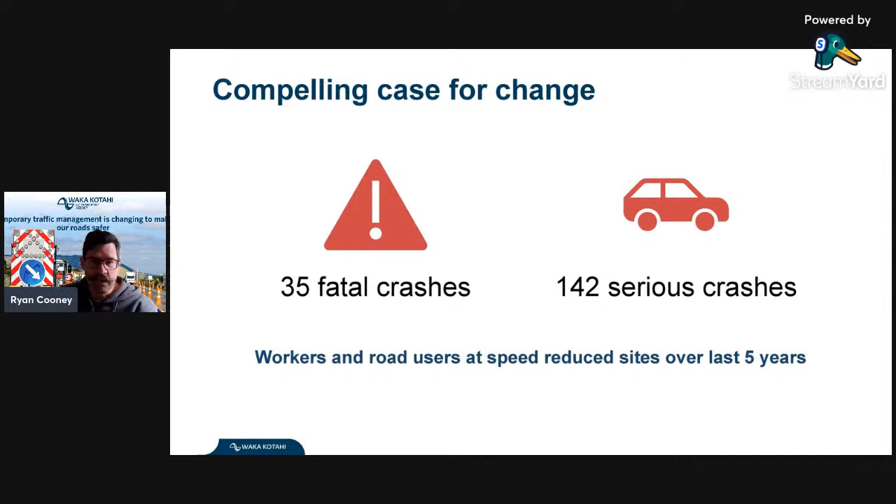There's another really important point here, which is around human vulnerability. In the guide itself, I talk about how a human being struck at 30 kilometers an hour has a reasonable chance of survival, up in the 90% range. A human struck at 60 kilometers an hour has a very poor chance of survival. And then we can carry on that same style of conversation for being in vehicles, etc. And obviously, this is all about safety being a critical decision-making priority.

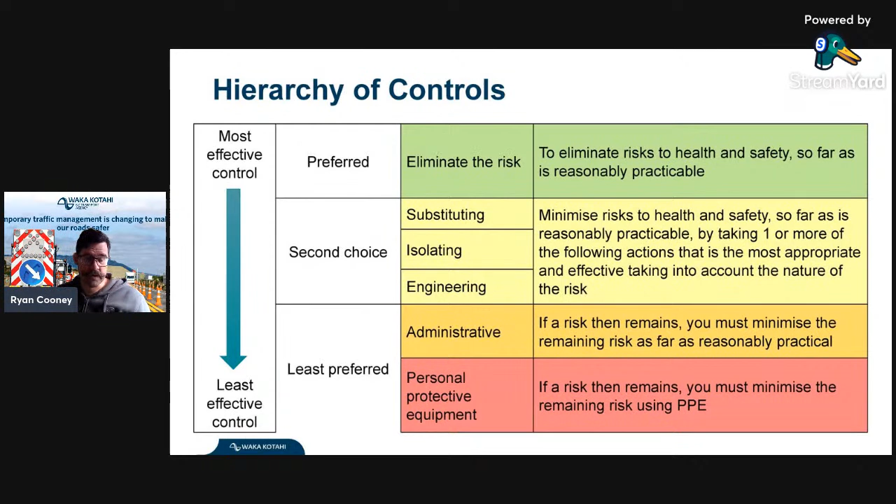So therefore, this starts to hint at doing things like stop-stop closures, where you stop all the traffic for a period of time to undertake your work, and then let that traffic go whilst the worker is out of the road. And I would hope that many activities that you good folk are involved in would enable you to think about applying types of practices such as that. And I know Elise will speak to the practice note in just a moment.

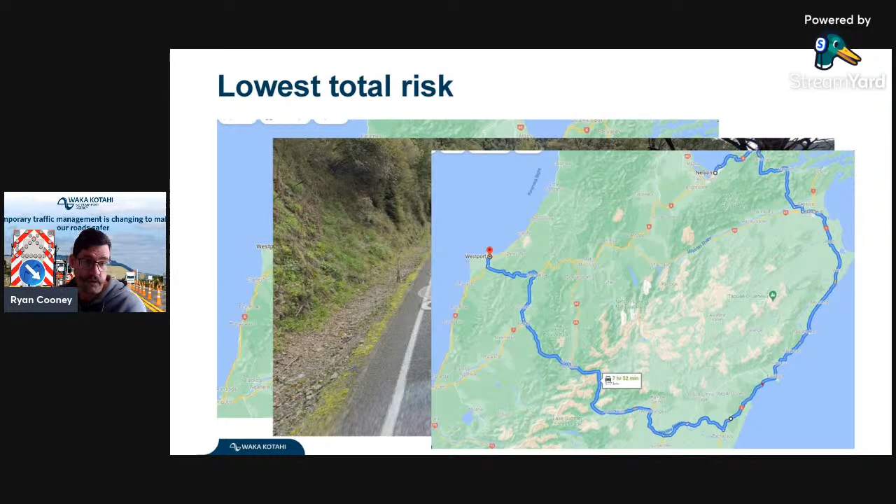So I will try and wrap up with these next two slides. Firstly, we have received all the feedback, 1,200 lines of feedback. Thank you very much to those who contributed. As I say, it was quite diverse in its feedback, so it made it quite challenging. However, we've identified 10 major changes now to enable us to publish version 1 of the New Zealand Guide. The intention with that is to move from our theoretical conversations to practical conversations.

So what we're looking to do as Waka Kotahi, as a client organisation, as a contracting PCBU, to use HASWA words, is to engage with our contractor PCBUs to test and trial via some of our network outcome contracts, which are maintenance contracts, and some of our capital or improvement projects. We have identified 5 NOC contracts that we will be piloting the guide through. We're still working on some capital ones.

And essentially we're going to test and trial and learn about many different things, such as training and competency, resource requirements, contractual terms, procurement terms, etc. In short, we are looking to a substantial change in the way in which we contract for TTM. It may be as far as saying simply that when we seek to engage a contractor to Waka Kotahi, we will have a provisional sum approach to temporary traffic management, and we seek a proposed methodology which becomes part of the assessment of the bid. The cost for delivering TTM is not fixed through a methodology such as that.

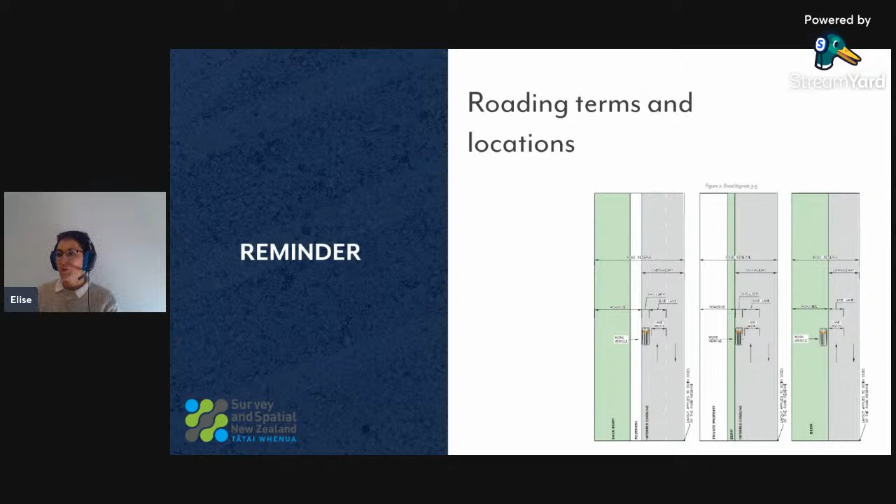And then from there, I could break it into environmental factors. So once we've got all of that information sorted, what kind of road are they going to be working on? So first of all, your terms, your roading terms, just really quickly.

Road reserve, so that is your RCA controlled piece of road, from boundary to boundary, and stops where your private property begins. So there's your boundary line, you've got back berm, footpath, front berm, your carriageway, so edge of seal to edge of seal. You'll see roadside crop up a lot, and there is a very extensive glossary of terms in the front of the practice note.

So when I'm talking about roadside, I'm talking about from that kerb and channel, or from the edge of seal, or where the chip runs out on the shoulder, then we move into roadside, okay? So anywhere where a vehicle would not typically be parked or driving or operating, that's our roadside.

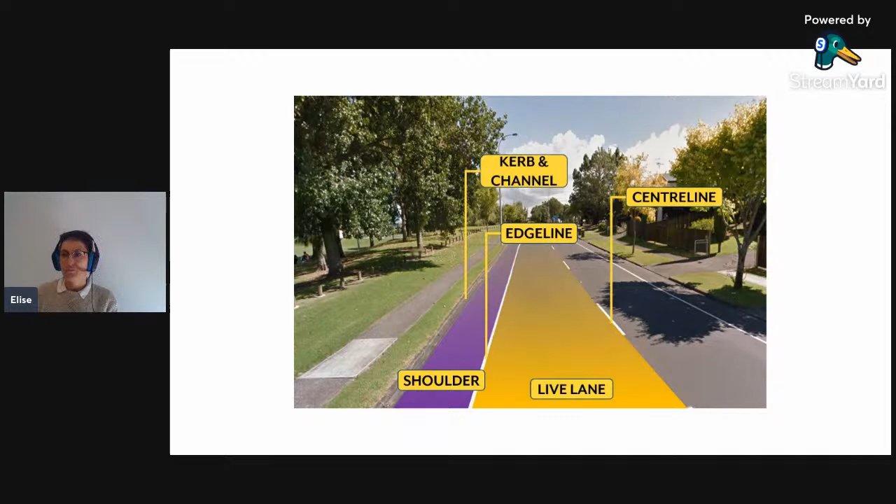Kerb and channel, shoulder, edge line, center line, live lane, they're all very basic standard terms that you should be familiar with. And then I understand that there is a possibility that there are some people on the call today that may not have been introduced to the new categories of road. This has been out now for, I believe, just over a year. Some of the TTM warrants are now tied to these categories as well.

So this did help form a lot of my risk-based assessments when it came to what I thought was appropriate to put into the practice note. So I think it's very important that everybody understands and is updated on the categories of road, because it links directly into the diagrams that you'll be selecting.

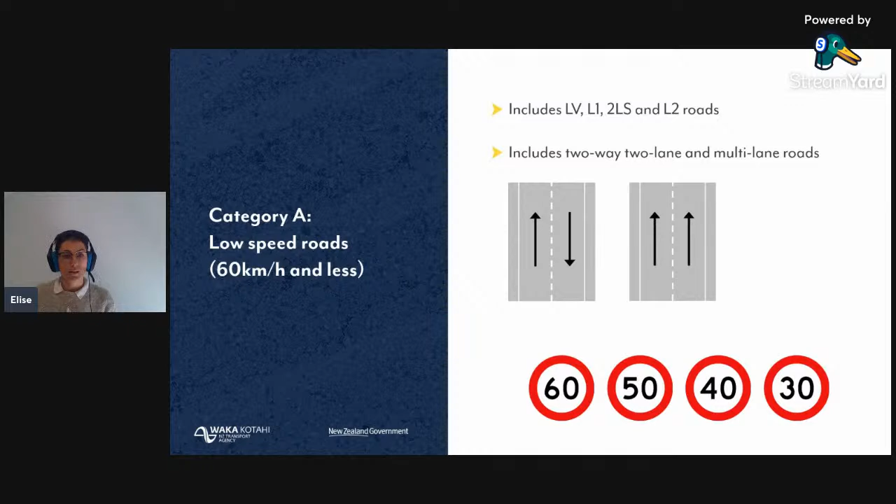So first of all, we've got our category A environments. Okay, they're our low speed environments, 60-kilometer roads and less. Okay, so it does include your 60K roads. They can be low volume, level 1, level 2 LS, or level 2 roads. They can be bidirectional, or they can be multiple lanes in one direction, as long as it's low speed. It's categorized as a category A road.

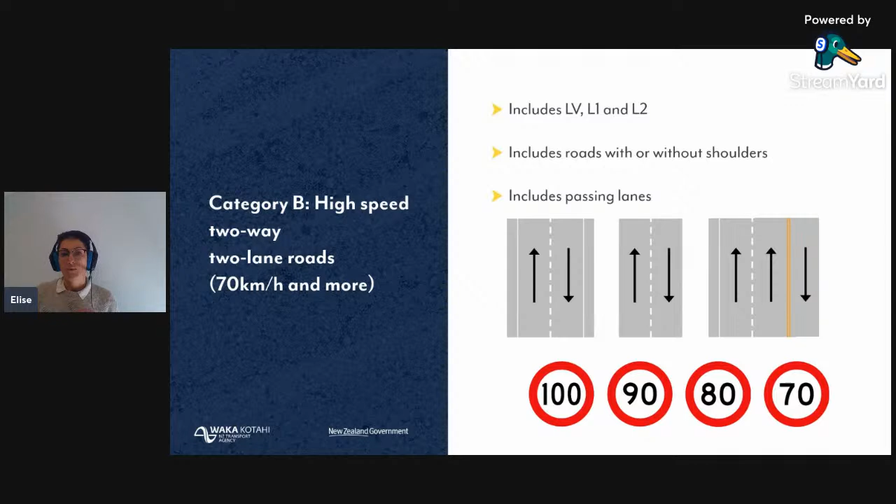Then we jump up to our category B roads. Okay, if you think these are more of our rural-based roads, they typically are from 70 Ks up to 100 kilometers an hour. They can be low volume, level 1 and level 2. Most of them will have very small shoulders, okay? Not a lot of space to pull over onto the side of the road, as we see in our rural type environments. They are mostly bidirectional, okay?

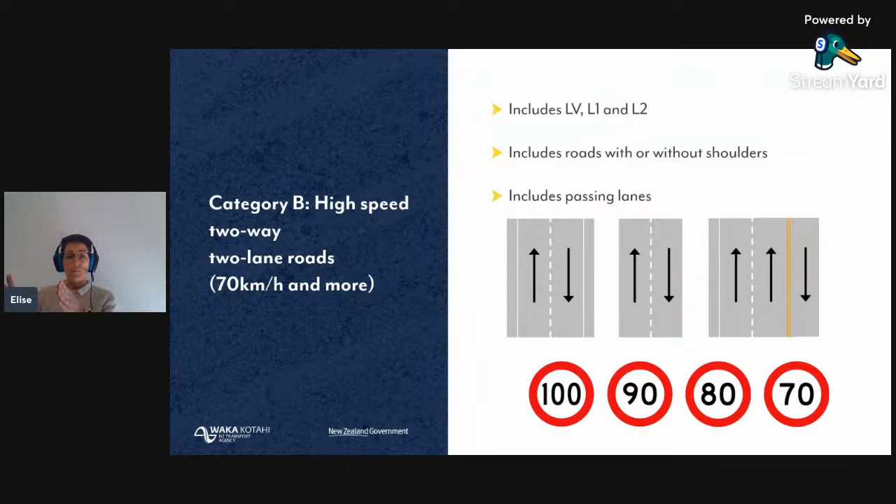But it does include areas where you've got passing lanes. So just because a category B road opens up with a passing lane, it doesn't make it a category C, which is, you'll see in a moment, our high-speed multi-lane roads are our category C roads. Okay, so typically, and now we actually have quite a few in the 110 kilometer an hour permanent speed limit. So 70 up to 110, and we're looking at multi-lanes.

Yep, motorways and expressways. They can still be level 1 roads. You think of all those expressways to Hamilton, some of those are still level 1 roads, but they're multi-lane now, so we treat them as a category C road. On-ramps and off-ramps are also included as a category C road.

Right, so within the document, there is an updated table of who can do what. Now, as long as you are either the old TC inspector warrant or the new practicing inspector warrant, you can do everything that you see in that grey and green box. I took quite a lot of time to make sure that the diagrams that I produced aligned with these warrants and didn't step outside or start to step into an area which would require a surveyor to take on a higher level of qualification.

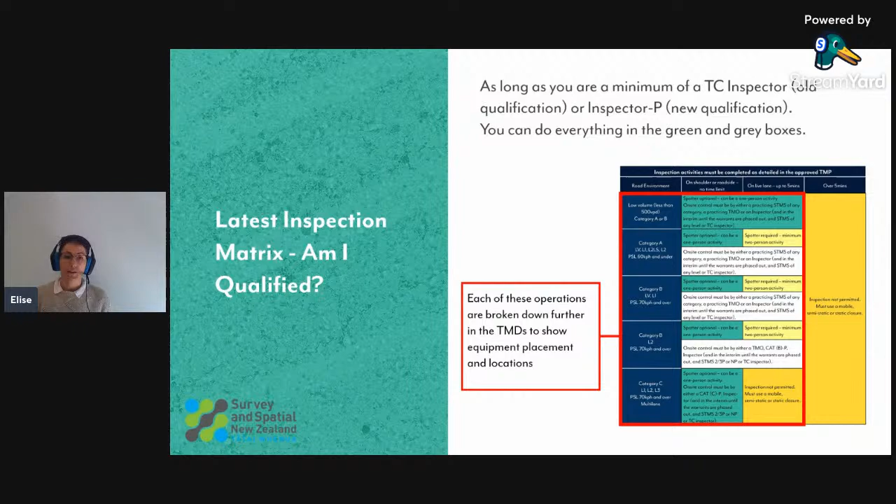So that's why some of the static equipment is optional based on your risk assessment, but it was noted that there was a need in some situations to put cones out. So we'll go over that in a moment. But basic qualification is your TC inspector for the old qualification, or the new qualification, which is called the practicing inspector.

So once I worked through all of those scenarios and I started breaking out the types of operations that I felt were appropriate, a few exclusions did come up. So a few areas did pop up which I felt nobody would be comfortable going out to undertake work. So the first one would be that there's static equipment required in the shoulder of a category C road. So if you can imagine trying to set up a tripod on the shoulder of a motorway, I just did not feel like that was an appropriate operation to include. So I have excluded it from the practice note.

I believe that there needs to either be a static shoulder or a semi-static TMP applied for in that circumstance. And same goes, the majority of RCAs throughout the country will not let you access the live lane under an inspection activity. So that is not included in the practice note. And finally, scenario 3 was where there is the presence of a cycle lane.

I'm going to show you a little bit more detail on this, just so you get a visual for what I came up against. So very common in a lot of our urban environments now, we have these lovely cycle lanes. Scenario number 1 being there's parking lanes close to the curb and channel where you may need to set up your tripod, which is fantastic. You'll be able to park your work vehicle in the normal parking bay and undertake your work.

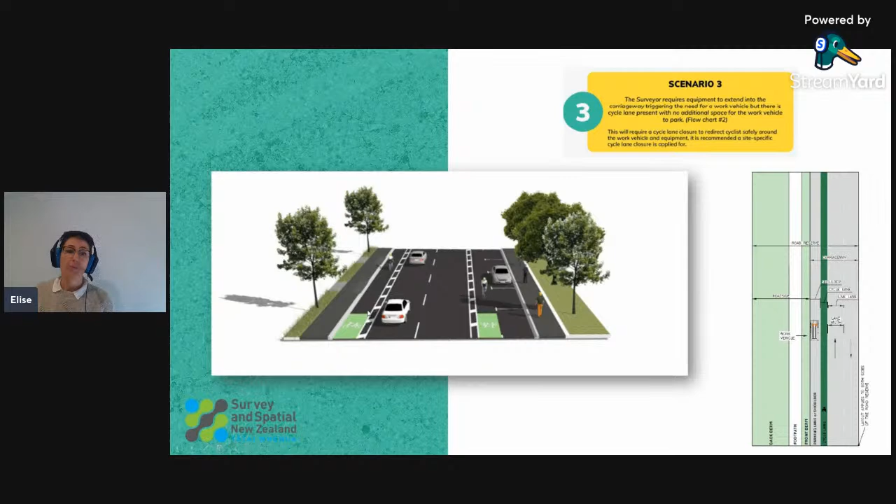So you will see there is an acceptable layout that I have included at the start of the practice note. So in this scenario, totally fine for you to undertake your survey with your static equipment straddling the curb and channel. But if you did go out to site and see that you were going to be lumped with this scenario here, we would be looking at a site-specific TMP in order to close that cycle lane. So that's just a little more context around that third exclusion category there.

There was no real way I could see it working. I did kind of workshop it and try and figure out, could you park back and then put a cone out next to your tripod? But even that, I just didn't feel comfortable. I thought, cyclists have their head down a lot of the time. They're not looking up too much in front of them, and having them swerve out around equipment, I didn't find the risk acceptable.

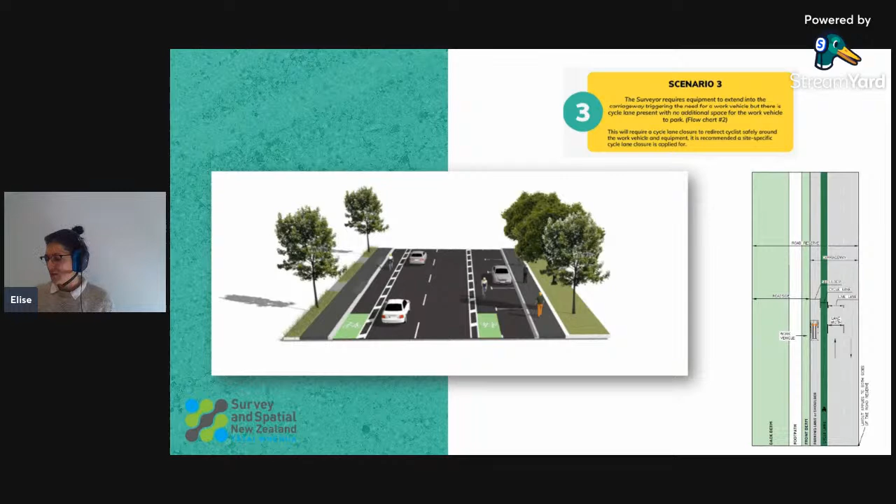So if you did want to check through those categories that we went over earlier, your level of road and your categories, maybe you're interested in lane width and whether or not it's arterial or non-arterial, there is a great website, which I'm sure some of you are familiar with. It's called Mobile Roads. You can just register and click on the RCA where you're going to be operating. It'll load up all of the information on the network, and then you press start and it will pop up a map like this. You find the road that you're going to be operating on, right click, and the information for that road will pop up.

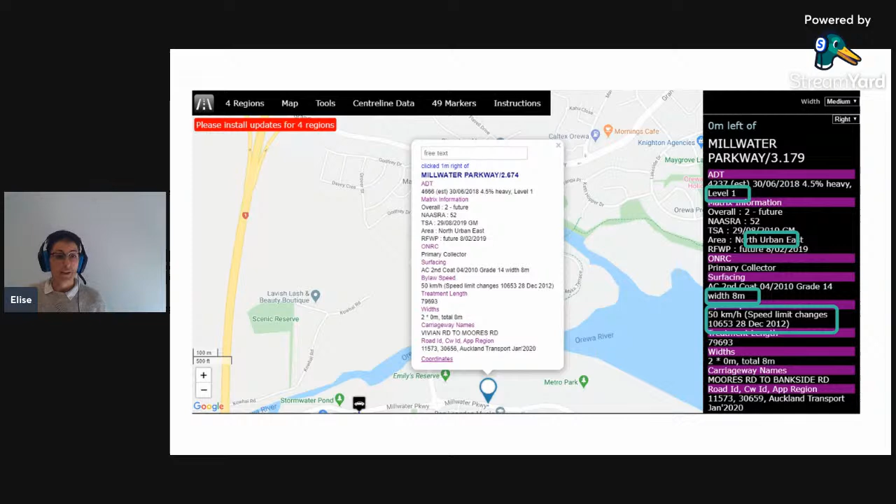So some of the information that will be given to you, and it's not always consistent. Sometimes you have to go and look at multiple databases in order to gain all of the information that you need, but it's pretty good. So you will get the road level in there, the operating speed, the carriageway width, as well as whether or not it's arterial, non-arterial, urban type environment.

So that's really important because we kind of got through the first iteration of the practice note and sent it out to the working group, and they came back and said, there are areas where, so we were always trying to maintain the lane width so that a vehicle wasn't pushed over a centre line when driving past the work vehicle that was parked. And it came to our attention that a lot of times you guys operate in new subdivisions, or sometimes there's rural environments, and there's not even a delineated centre line. And parking is actually designed to be in the movement lane often as well. Sometimes there's indented parking spaces. There's a whole lot of other factors that started to play into it; we made the diagrams too prescriptive in a sense.

And so this next iteration that we came out with was, all right, we need to split our operations into arterial and non-arterial and look at the risk profile of those two types of roads. So I dove into the One Network Road Classification documentation and had a look at some Austroads stats as well about maintaining lane widths on certain types of road, and really happy with what we came out with. We've got different sets of diagrams for arterial and non-arterial environments.

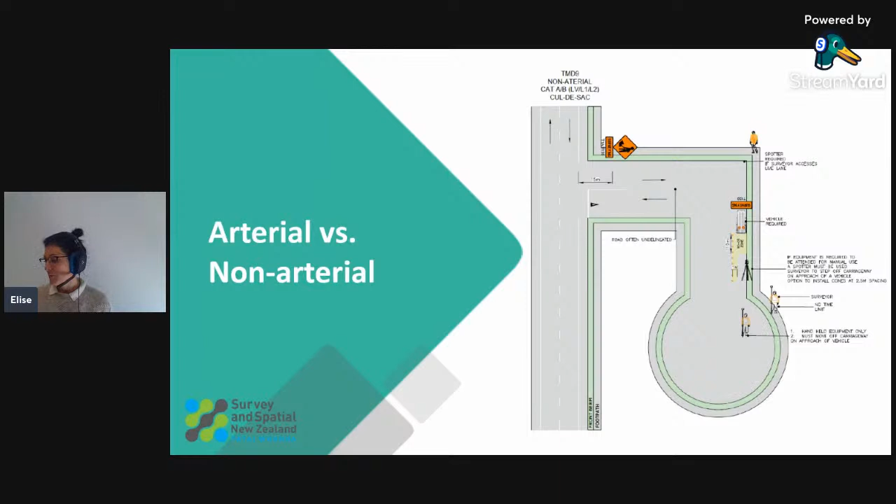Here's a really good diagram to show, in those new subdivisions that you may be surveying, they don't have centre delineation. They don't have line marking. Everybody parks on the curb and channel. That's where you park. A lot of them don't even have driveways or garages that you park off the street. Parking in the movement lane on the road is acceptable, and that may not allow for an entire lane width as we know it, 3 metres or so, to be maintained. So we wanted to make that really clear that this is completely acceptable, and we were happy to accept that risk.

That did make for quite a few diagrams, as you can imagine. We've split it out; therefore, there are 5 flowcharts, decision flowcharts, to help you choose the correct diagram. So once you know the level of road that you're working on, the category of road that you're working on, and whether or not it's arterial or non-arterial, it's quite easy to navigate your way through these flowcharts. So you can see non-arterial, there's just one.

It's very simple, but once you start getting up to those arterial roads, it is split into strictly roadside activities, roadside and shoulder activities, and then activities where you need to access the live lane. So there's 3 charts for that. And then the final one is any arterial roads where you're going to be working behind a permanent barrier system. So there's a couple of diagrams in there as well, because there's a lower risk working behind a permanent barrier system. So those are the charts that are available to you.

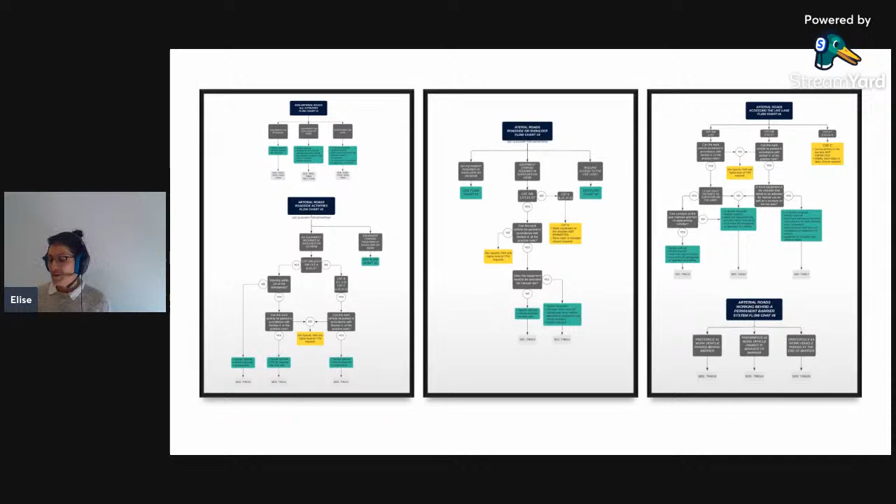If you have any questions, or if something doesn't flow, please let me know. It is designed for you to be able to take out into the field and use as you're doing your on-site risk assessment, to see which diagram is going to be most applicable for you. So just a quick comparison around that arterial and non-arterial. Both of these operations have a tripod straddling the curb and channel or on the roadside, and both of the operations have a surveyor needing to access the live lane to take a mark.

So when we got feedback from the first time round, surveyors said that often they have to park their vehicle where everyone else usually parks their vehicle, and that can block the signage on the back of their vehicle, so they wanted an option to be able to walk out a static advance warning sign. I didn't see an issue with that. Most of the time, roadside, you can walk it out. We do just ask that if you did need to install it, you park your vehicle in front of it while you install it, and you obviously install it from the side of the road.

They also came back with wanting to keep the parking bay in front of the work vehicle vacant. So being able to place 5 cones along the front of the work vehicle to keep that park free and protect the tripod slightly, that was put in there. Note that it is optional though. Okay, so you'll see that they are grayed out on the diagrams, and it is an option. It's not 100% needed every time.

Now, the other thing that was on here is for the arterial roads, we noticed that there was a risk the further away that you operate from your work vehicle. Therefore, we want to see you limiting the forward working distance from your work vehicle. And I have prescribed that on here from some information that I found in documentation. So for those high-speed environments, we don't really want to see you working more than 50 meters away from the front of your work vehicle.

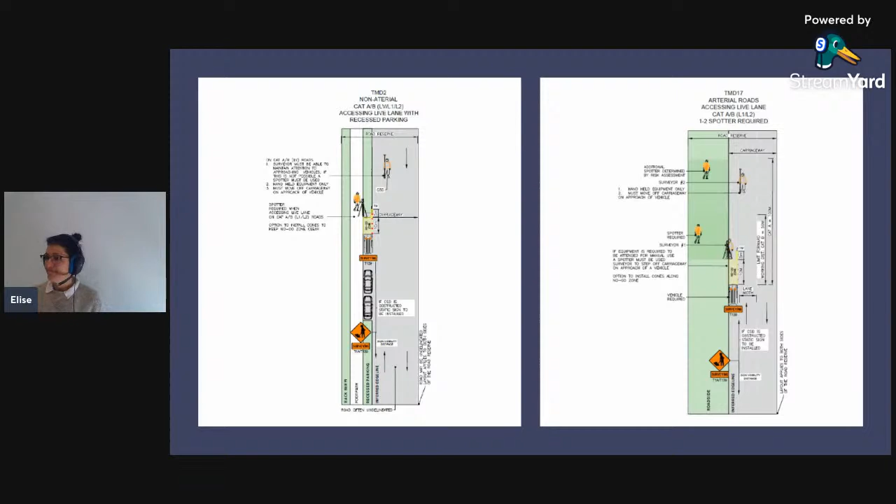So the dual system: we're not transferring over to the guide anytime soon, I believe, and we need to be prepared for some local RCAs to potentially not adopt it at all, and they may want to stay with the code. So right back at the start, when Nick and I had our first conversations, we were trying to figure out how do we do this so that we can start to move towards the guide and do something that's really applicable to the way that surveyors work, but at the same time, still be able to get you guys access to the network by having a TMP put in.

So we've created, and I've just updated this recently, an editable PDF. So only the sections on the PDF that need editing can be edited. Everything else is locked, so you can't accidentally copy and paste and make a mistake in here. So what this allows you to do is just input the details for your RCA, who's doing the work, where you will be working, and grab the practice note as an attached document. All of the diagrams are in there. It's all listed, ready to go for you in the Proforma, and that will be ready for you to submit to your RCA for approval under the current system that we're running now.

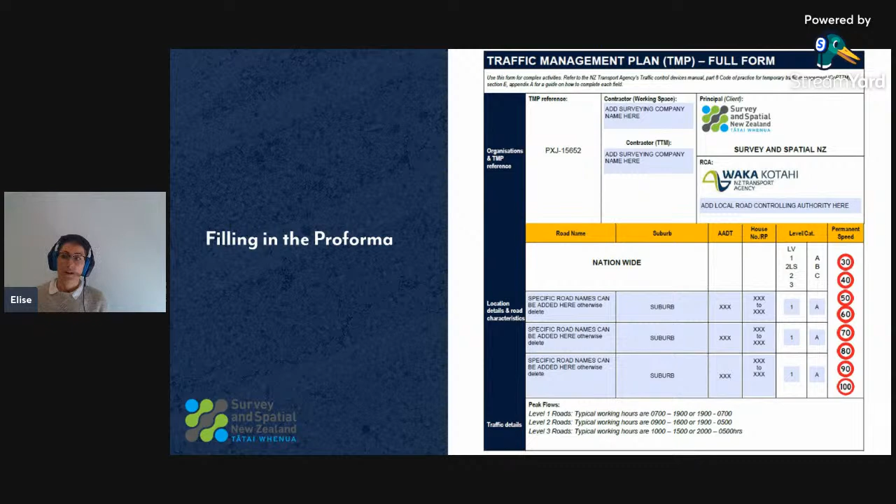Hopefully in the future, there will be RCAs that will just allow us to run off the practice note. So that will be your document. But in the meantime, we still need a TMP to go and access the network. So that's why we've got this. We're trying to make it as easy as possible for you just to fill in the details and submit that to your RCA. Yeah, so that's my part done.